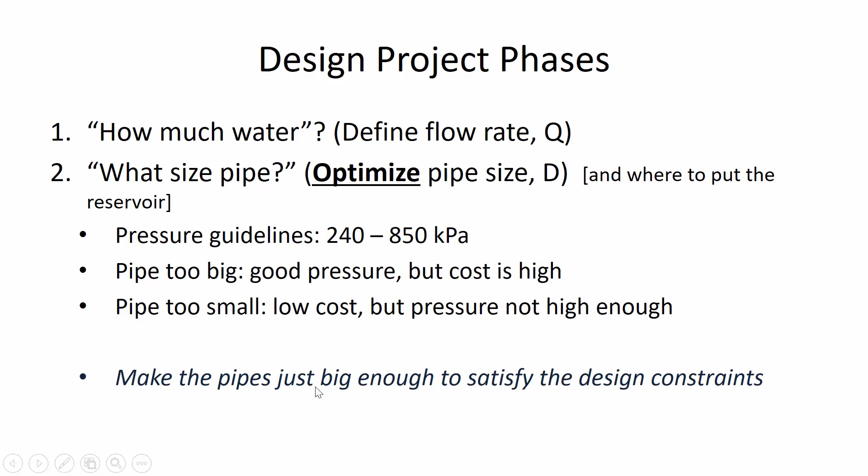But on the peak day, it's okay for it to dip as low as 240. So it makes the pipes just barely big enough. That's the essence of iterative design.

Now, there are a couple of resources here that if you maybe have lost touch with the very brief demo we had in lab last semester and you want a refresher on how to click on the buttons and how to type in pipe data and that sort of thing, I have a couple of YouTube videos there, and these slides are available on MU Online, so you don't have to necessarily write down this link. You can just click on it in the notes.

Nowadays, I think most programs have a built-in PDF printer, but if your computer doesn't, you can get a free open source PDF printer so that you can go straight from the program to printing PDF files. PDF Creator is a good resource for that.

This is a good example of what you need to turn in a week from today. Now, this is from a few semesters ago, and one of the differences between then and now is back then I didn't give students the flexibility to locate the pipes wherever they want. So back in this day, the students were required to follow a certain route for their pipe networks.

But now you're not. So for example, see this junction J? There's no outflow at junction J, so the water doesn't necessarily even need to be there. So maybe it would make more sense to have the water go straight from K, which is the hospital, over to I, the housing project, because you're going to minimize the distance if you go in a straight line rather than going in a less direct route.

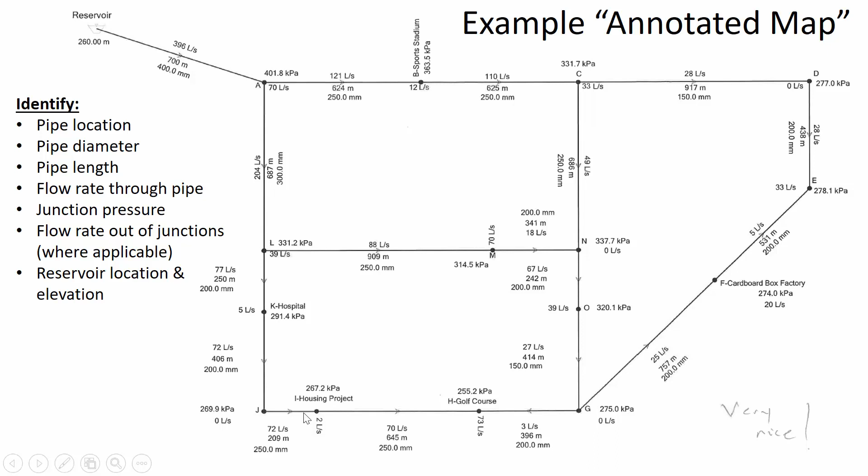All right, so now we're going to talk about some more open channel flow considerations. Remember that we've already talked about total energy, which is another word for the energy grade line. There are 3 terms to the energy grade line: the elevation above some datum, Z, the depth of flow, Y, and the velocity head.

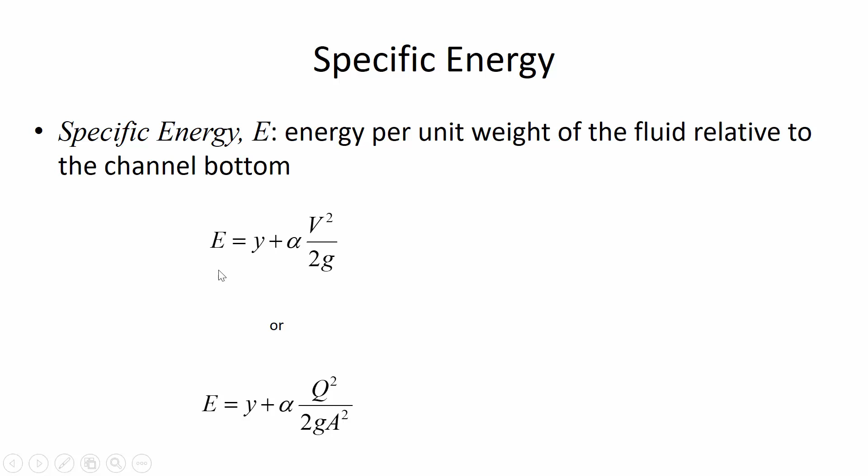The specific energy is different from total energy because it doesn't include the delta Z term, the elevation above some datum. It's called specific energy because we're talking about the energy relative to the channel bottom at a certain location, measuring the depth of water relative to the channel bottom at that spot. So for specific energy, we still have the depth and the velocity head, but there's no Z term.

To illustrate how we use specific energy and what it means, let's consider a rectangular channel that has a bottom width of 4 meters and some unknown depth. The flow rate Q is going to be the velocity times the cross-sectional area. Let's say we're going to have this channel convey 10 cubic meters per second.

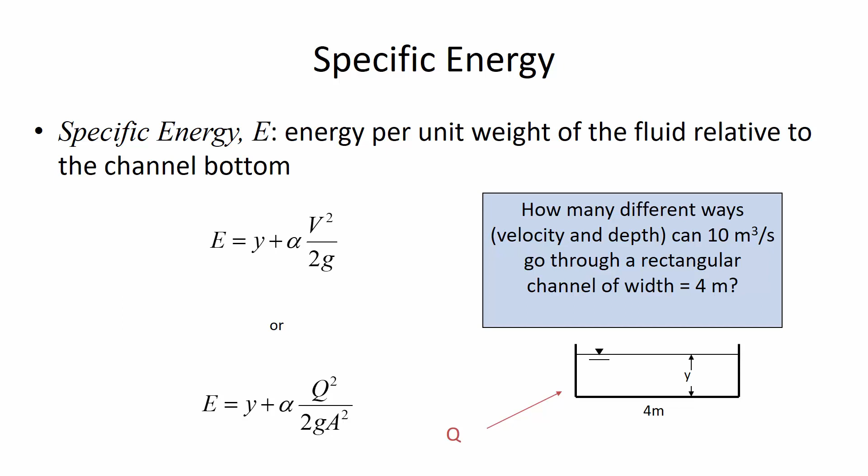Now think about all the different combinations that could occur of velocity and depth. For instance, you could have a really shallow depth but the water moving fast at a high velocity, so you'd have a high V and a relatively low cross-sectional area. That would be characteristic of a pretty steep slope - that's how you get a fast velocity with a shallow depth. At the other end of the spectrum, if the slope was relatively mild, the depth would have to be taller and the velocity of flow would be less. Any questions so far?

Here's a table that illustrates a range of extremes. At one end, here is a high velocity for the certain flow rate. If we know the cross-sectional area is Q divided by V, then the cross-sectional area here would be 1 for this top row. The depth is A divided by 4, since we know the cross-sectional area is the bottom width of 4 times Y. So if we rearrange to solve for the depth Y, it's whatever the area is divided by 4.

For each one of these different combinations, we could calculate the specific energy. I've done that thing to the velocity head that we sometimes do - rather than saying V squared divided by 2G, we can also express the velocity head as Q squared divided by 2GA squared. We did that sometimes in closed conduit flow, and we can do the same thing in open channel flow.

So take, for example, if the velocity is 10, then the cross-sectional area is 1, and the depth would be 0.25. We could calculate the specific energy: it would be this depth of 0.25, plus Q squared divided by 2GA squared. You'd have a pretty high specific energy at this top row, and most of it is coming from the velocity head. Do you see how that's the case?

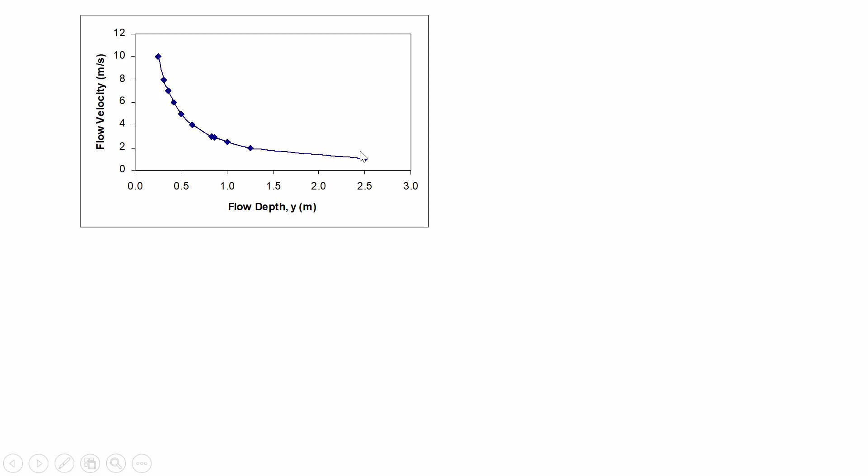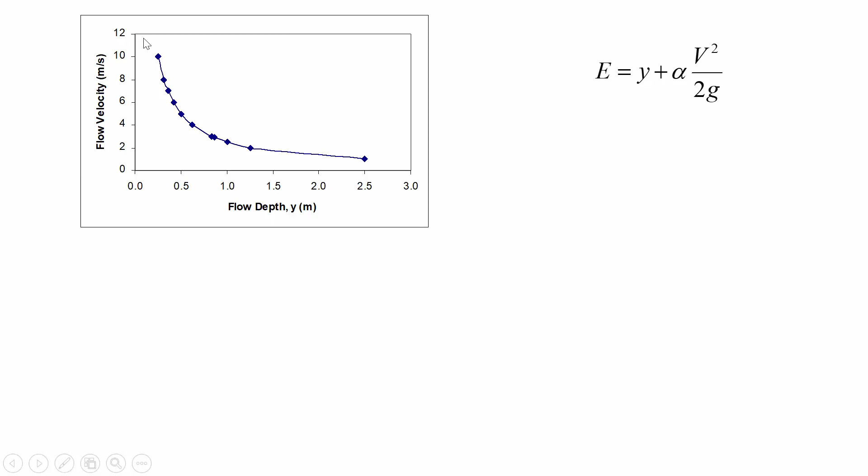Okay, so if we go back to the underlying data, you'll see that there were two different depths of flow corresponding to the same specific energy. Take, for instance, around 2.5 meters of energy in the lower range where you have low velocity and high depth. But then there's another crossover point where you again have the same 2.5 meters of specific energy, but that's where the velocity was much higher and the depth of flow is much lower.

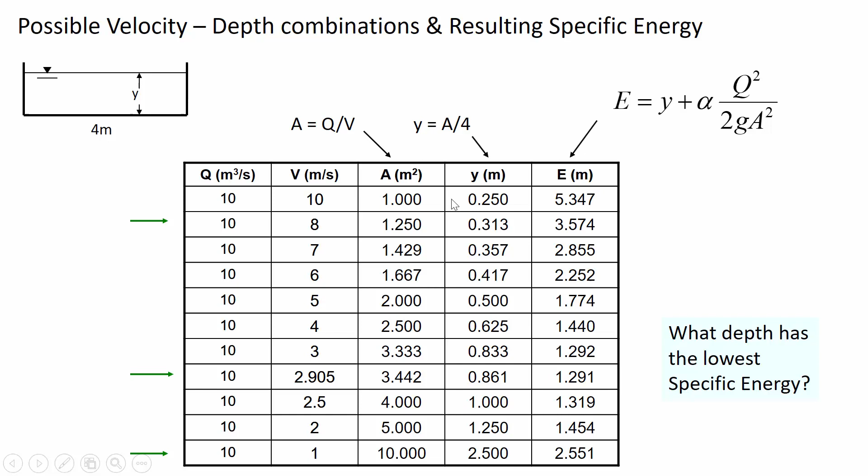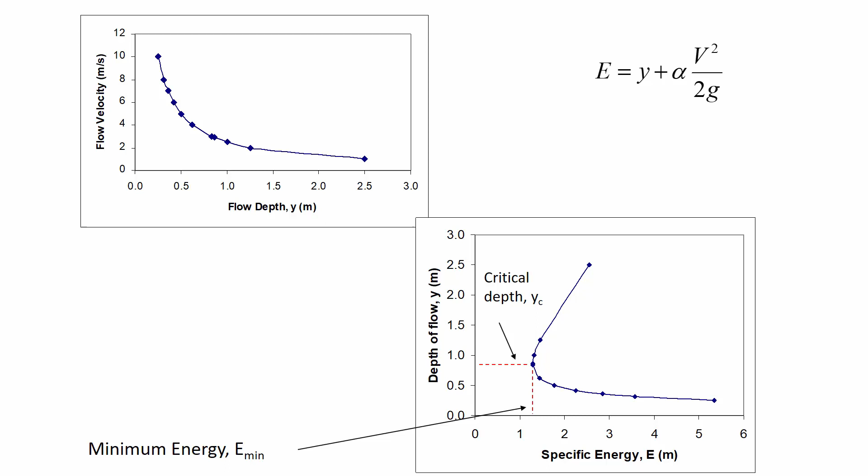So what we've done is taken this E column and the depth column and graphed it this way. The critical point of the lowest specific energy, we can reflect over to the vertical axis, and that's the same depth, the critical depth of 0.861 meters in this case. That corresponds to the minimum specific energy for a certain flow rate. Now it's for a certain flow rate and a certain channel configuration. Remember, this is a 4-meter wide channel. If it was any other channel geometry, it'd be a completely different figure. Or if it was any different flow rate, the figure would be changed as well.

Now, the thing that controls whether the flow is going to be supercritical or subcritical is predominantly the slope of the channel. I mean, all of the geometric parameters play a role, but there's a region of this graph, any flow depth that's below the critical depth, we call this region supercritical flow. I know that's going to be counterintuitive at first because you'd think, well, if it's below a line, why is that supercritical? So this red dotted line is the depth that corresponds to critical depth. If any of the depths are less than that, then the velocity is faster. So this is the region of the figure that's supercritical, and above the line, the water is moving slowly because it has a relatively higher depth.

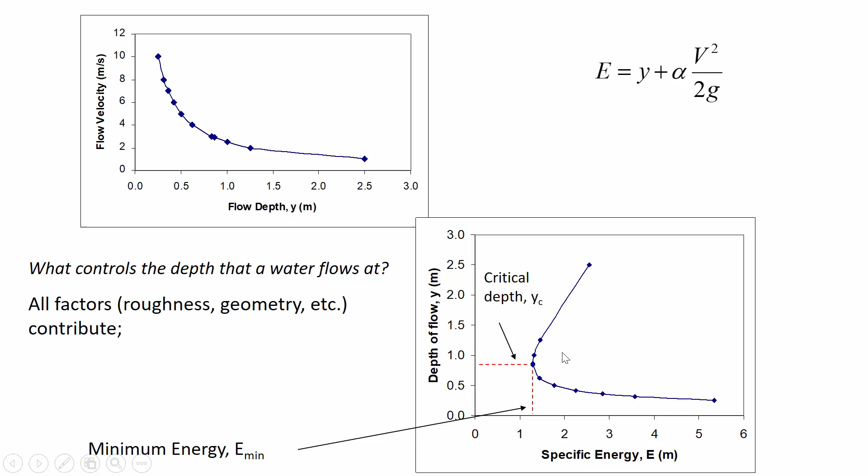So for the slower moving water, you have subcritical conditions above the line. We'll get into all of that, but what actually determines whether the flow depth is shallow or deep and whether the velocity is fast or slow, slope is the main factor that controls it for a given section shape.

Is the critical depth in the box, or is it anywhere below that, where it's supercritical? Yeah, it would be any of the depths below it.

Along this line is the specific energy that corresponds to various depths. So if you had a flow depth of 0.5 meters, the specific energy at 0.5 meters is, it looks like, around 2 meters of energy.

The other thing that's a really big idea you're going to hear over and over through the coming lectures is the idea of alternate depths. These are two depths that have the same amount of specific energy, for example, of 2 meters.

If you have 2 meters of energy, the flow might be going, looks like maybe 0.45 meters of depth. That would be the supercritical depth associated with that specific energy. And then if you go back through the other intercept of that figure, it looks like there's also a flow depth of around 1.9 meters for the same specific energy.

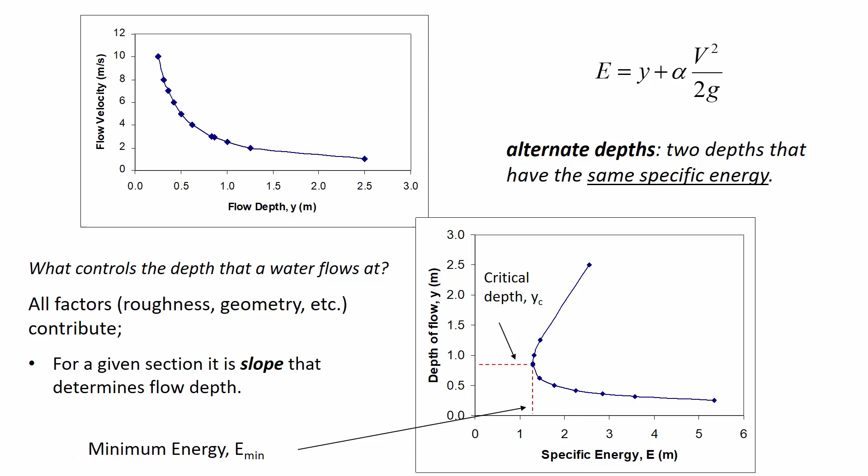The idea is that if you can graph this specific energy curve, then you can predict what depth the water is going to jump up to after it goes through the hydraulic jump. It's important to be able to predict what the alternate depth is going to be.

So different ways to classify flow. We've talked about how flow can be uniform, non-uniform, steady, unsteady, turbulent, laminar. Critical and subcritical is another way to classify flow regime. When the depth of flow is greater than the critical depth, that's when conditions are subcritical. And when the depth is less than the critical depth, that's when flow conditions are supercritical.

Sometimes people get it confused because it's not necessarily the depth that the name is based on, but it's the velocity that the name is based on. Subcritical corresponds to the flow conditions when the water velocity is slow.

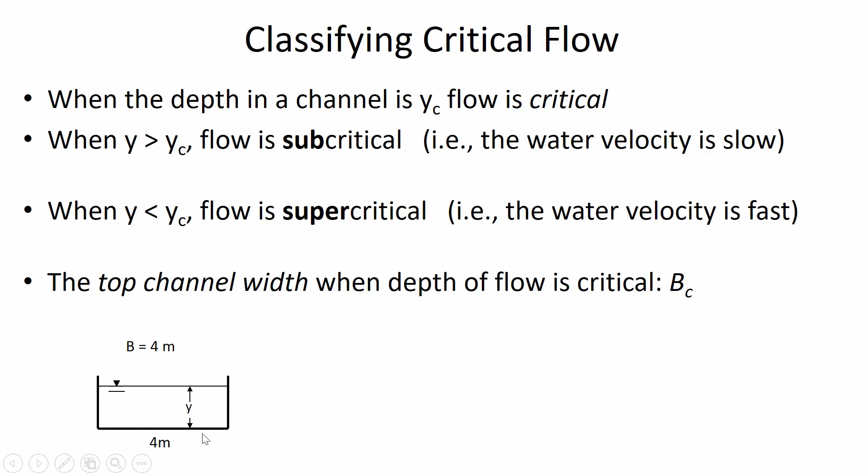There are some geometric parameters we can calculate. The top width at critical conditions is B sub C. With a rectangular geometry, the bottom width and the top width are going to be the same. But with trapezoidal geometry, this top width is going to depend on how deep the water is and what the side slope characteristics are.

The reason I mention this top width is that one of the formulas we can use to calculate the Froude number is shown here, which you've already seen. But for trapezoidal geometry, it's easier to use this equation on the right, where you've got the flow rate, the top width, gravitational acceleration, and the cross-sectional area. So this is the Froude number squared.

The reason it's important to know the Froude number is that if your Froude number is less than 1, that corresponds to subcritical conditions, and greater than 1 is when you've got supercritical flow.

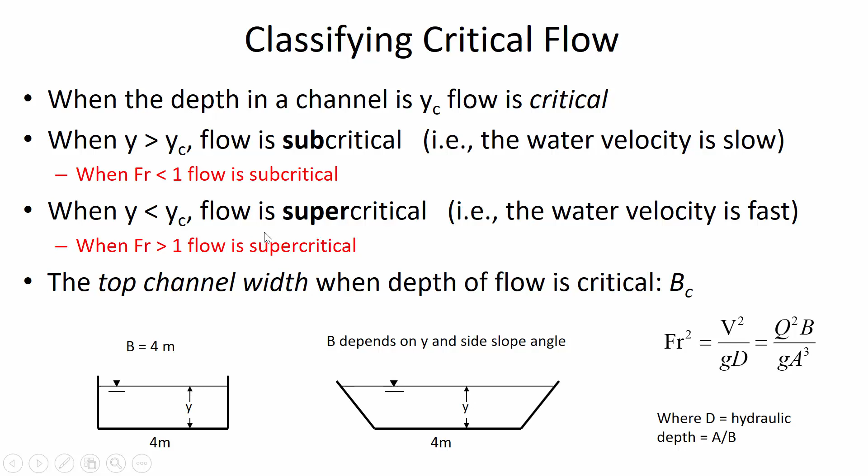Hydraulic depth is usually assigned D in your book. Some other references, including the FE manual, call it Y sub H. It's the ratio of the cross-sectional area to the top width.

Consider the hydraulic depth of a rectangular channel. If the cross-sectional area is B times Y, and you divide that by B, the hydraulic depth of a rectangular channel is just Y.

There's a special case for a very wide channel, which has a technical definition. This semester, a very wide channel is one where the width is more than 20 times greater than the depth. In that case, whether it's trapezoidal or rectangular, the hydraulic depth is also just equal to Y.

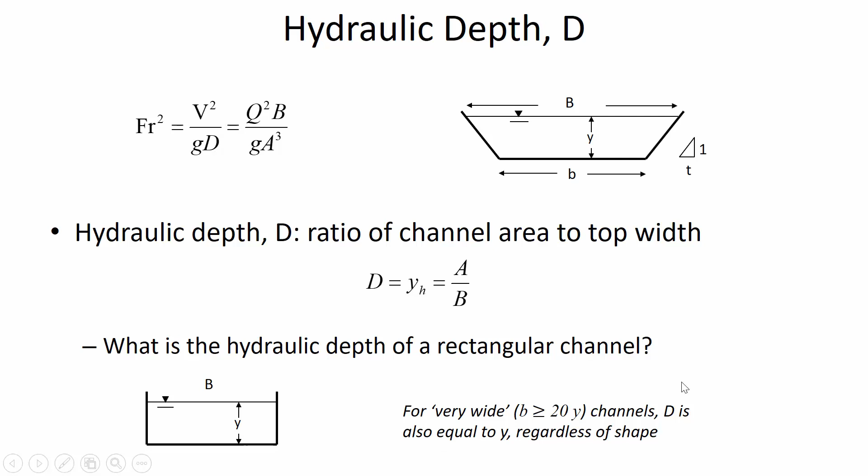The reason is that if the channel is very, very wide, the effect of any side distance is mitigated. If it's trapezoidal but extremely wide, those side triangles don't contribute much cross-sectional area, since the cross-sectional area is mostly the rectangular portion of the channel. So there are a couple of special simplified versions of these formulas that we'll go through in coming lectures, only applicable for a very wide channel.

I'd like you to get some practice diagnosing the flow regime. Let's say we have this same 4-meter wide channel with 10 cubic meters per second going through it. What is the Froude number when you've got a depth of 0.25 meters? And what is the Froude number when you've got a depth of 1.25 meters? We're trying to determine the flow conditions—supercritical or subcritical—for each of these depths.

Let's not solve it using the graph this time, let's just go straight to the Froude number. It says to solve it both ways, but because the quiz put us a little behind on time, we'll just do the Froude number.

I guess we don't actually have to create the graph, we can just look at it and use it to diagnose both cases. For a depth of 0.25, using the vertical axis, 0.25 is less than the critical depth. The minimum specific energy occurs at a depth of about 0.86. If the depth is below that minimum point, it's in the supercritical range. So for this first depth of 0.25, conditions are supercritical.

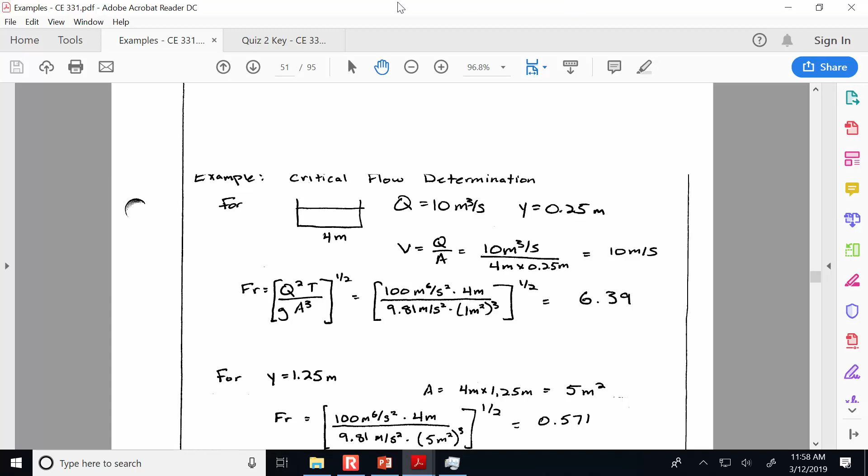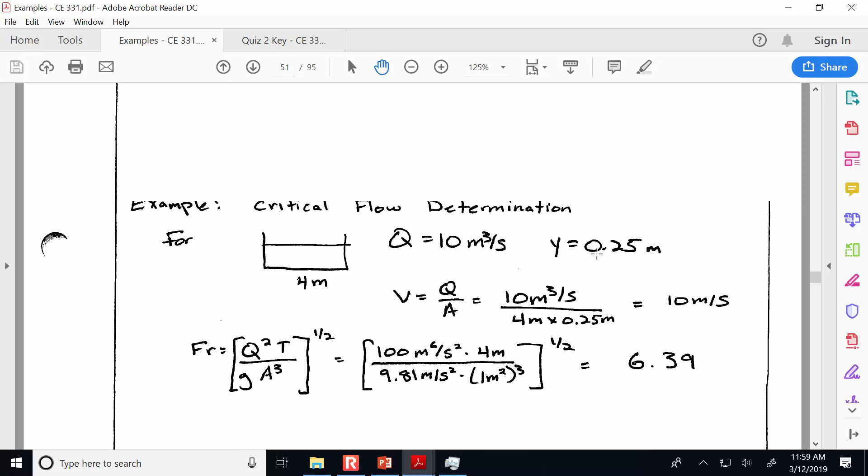We can confirm that by calculating the Froude number. If the flow rate is 10 and the depth is 0.25, we can calculate the cross-sectional area and find the velocity, which is 10 meters per second. The Froude number is the flow rate squared times the top width of 4, divided by g times area cubed, then take the square root of everything. Since the Froude number is greater than 1, that depth of 0.25 yields supercritical conditions.

So that one is supercritical. Now what about the depth of 1.25 on the graph? 1.25 is greater than the point associated with minimum specific energy, so it's in the subcritical range. We can verify that by calculating the Froude number: with a depth of 1.25, the cross-sectional area is 5. Putting that into the same Froude number equation gives a Froude number of 0.571, so that's subcritical.

So supercritical is when the Froude number is more than 1, and subcritical is when the Froude number is less than 1. We can create a figure from it and calculate the Froude number. Any questions about this example?

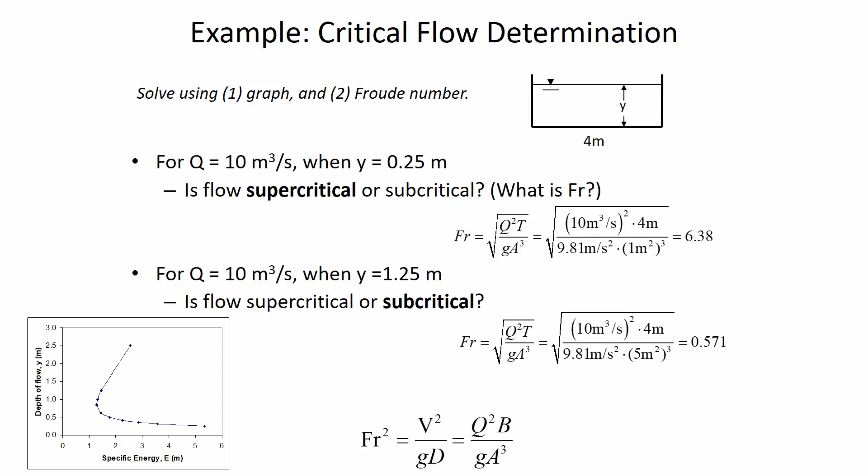Alternate depths are situations where the same amount of specific energy yields two different depths of flow. If you draw a vertical line from any particular specific energy and it crosses the graph in two locations, that means two different flow depths could occur.

If the depth is 0.5 meters, you can solve for the specific energy that goes along with that depth from the graph by going over and intersecting. The other way to find the specific energy is to substitute the depth of 0.5 and find the cross-sectional area for this width of 4 and depth of 0.5, which gives you both the velocity head and the depth term for specific energy.

To solve for the alternate depth, we would find the total specific energy at one of the depths, and then find the amount of specific energy being the same for the other depth.

There isn't a marker here in the classroom, but I can usually count on at least one of you to have it. Thank you very much. All right, let me do this one on the whiteboard.

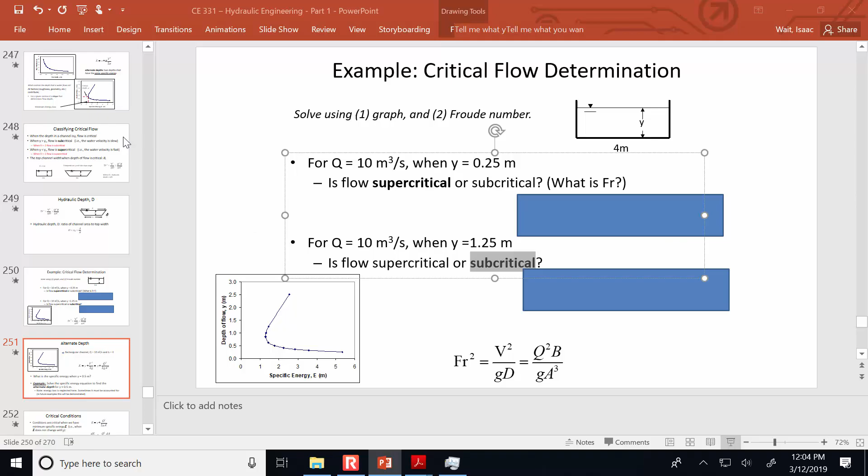What we can do is say that 1.774 meters equals y plus 100 divided by 2 times 9.81 times 4y squared, putting that in terms of the unknown depth, this other unknown depth that can give you the same amount of energy.

So y is the unknown depth. We still know that the flow rate is 10, so 10 squared divided by 2g, and then the cross-sectional area is 4 times whatever the depth is, squared. So we can rearrange this. This is going to be a cubic equation.

So we're going to multiply each term by y squared, giving 1.774 y squared equals y cubed plus 0.3186, since this last term is the same thing as 0.3186 divided by y squared.

So if we just have 100 divided by 2 times 9.81 times 4 squared, that cubic equation then is plus 0.3186.

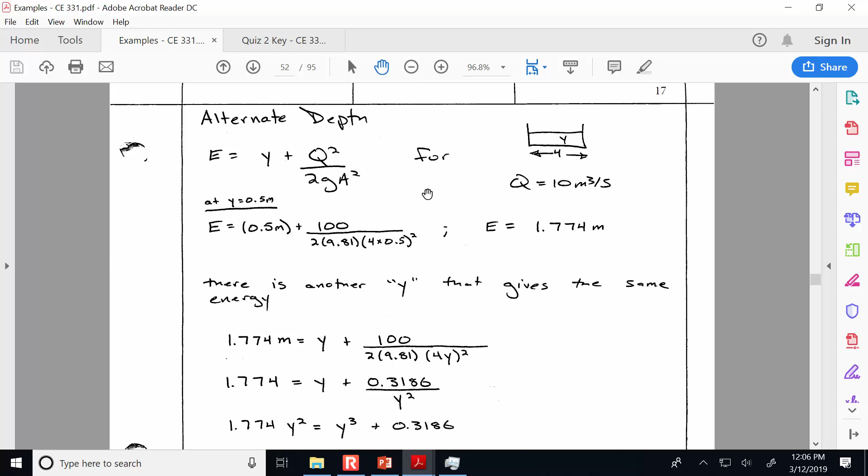If you put it into your calculator, you'll find the three roots: one is negative 0.3842, another is the depth we already knew, 0.50 meters, and another root is the depth we're looking for, 1.658 meters. That is the alternate depth, 1.658 meters. You could solve it numerically using a spreadsheet, but you can also solve it by finding the roots of that cubic equation.

Any questions about alternate depths?

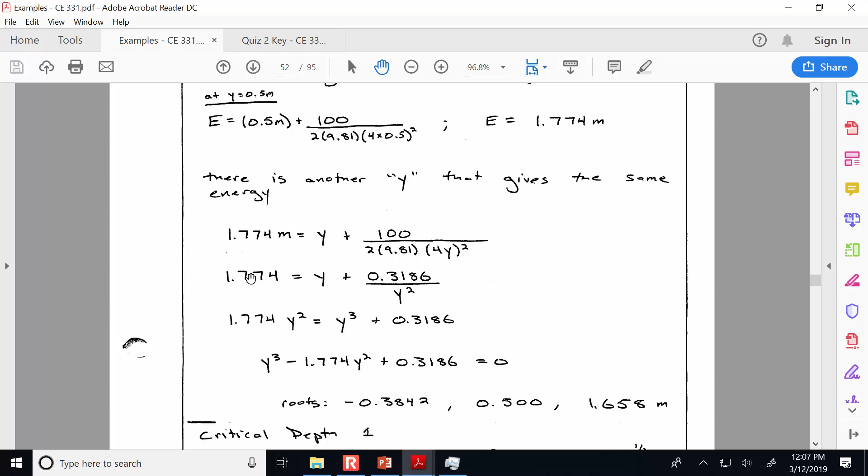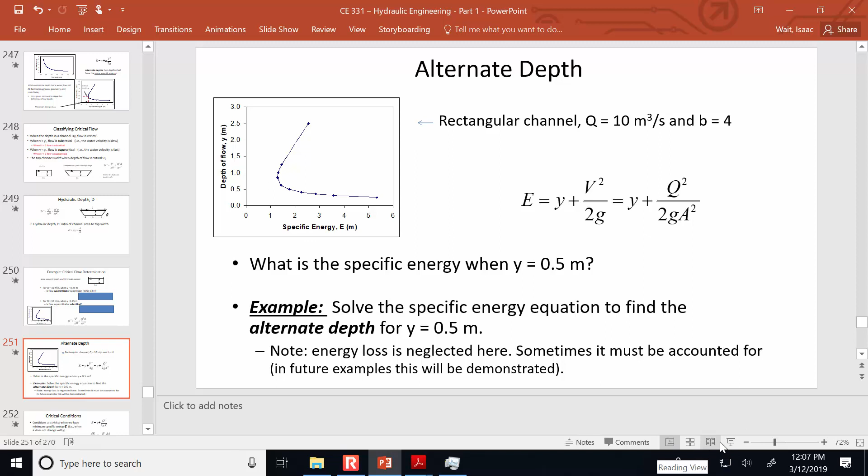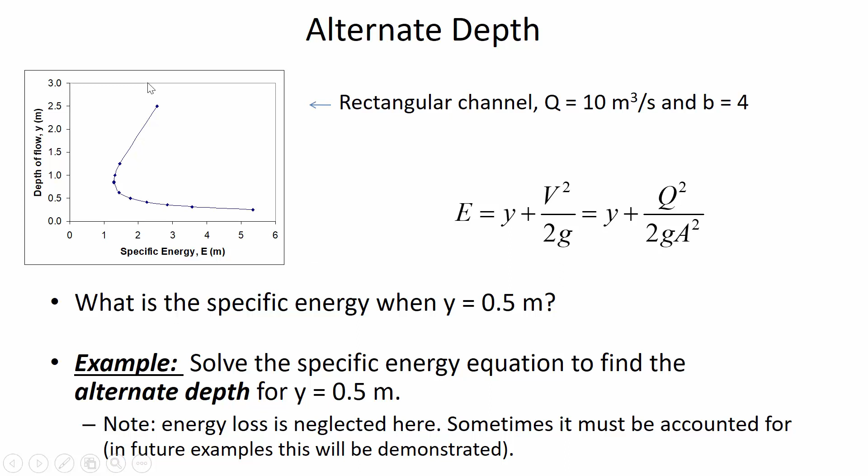One thing we didn't account for was any energy losses as the water transitions from a supercritical to a subcritical depth. In a hydraulic jump, in reality, when water goes from a supercritical depth to a subcritical depth, there's a lot of turbulence and quite a bit of energy is lost. We will account for and demonstrate those energy losses in the future, but just looking at the theory behind specific energy and alternate depths, we haven't yet accounted for any of those losses.

Critical conditions correspond to the minimum amount of energy to convey a certain flow rate through a channel, so it's where you have minimum specific energy. That means if you look at this curve, there isn't any slope at the minimum point—it's completely vertical, not sloped sideways like in the subcritical or supercritical zones. This is the definition of specific energy: it's just the energy relative to the channel bottom at a given location.

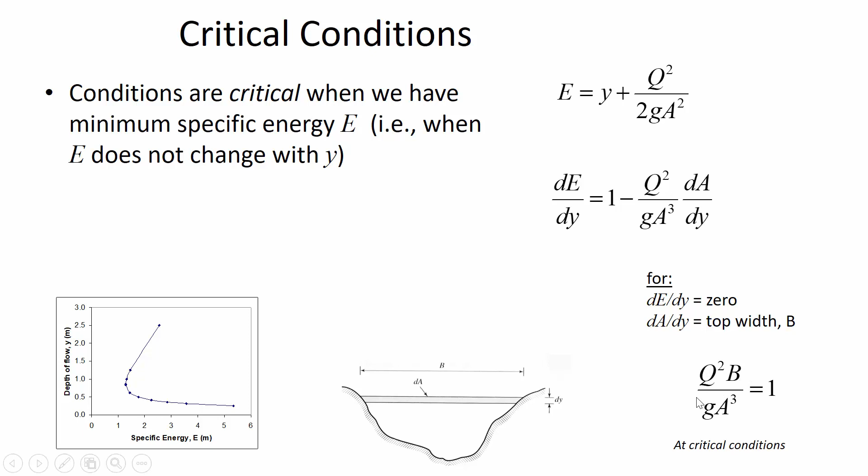If we take the derivative of that with respect to y on both sides, this is where the Froude number equation comes from, where the Froude number equals 1 at critical conditions. So the flow rate squared times the top width divided by g times A to the third power equals 1 at critical conditions.

If we rearrange that, since this was 1 on the right side, under critical conditions, if we want to find the critical depth, regardless of the cross-sectional shape—whether trapezoidal, half circle, or triangular geometry—this can always be used to tell you what the critical depth is.

As an example, if you want to find the critical depth for a rectangular channel where the flow rate is 10 cubic meters per second and the channel width is 4, this is that same rectangular channel we've been talking about today. We can find the critical depth using this formula.

Just by substituting in, it's q squared divided by g. Now for the cross-sectional area, if the width of the channel is 4 and the unknown depth is y sub c, the right hand side of the equation would be 4 times yc cubed, divided by b sub c, where b sub c is the channel width at critical conditions.

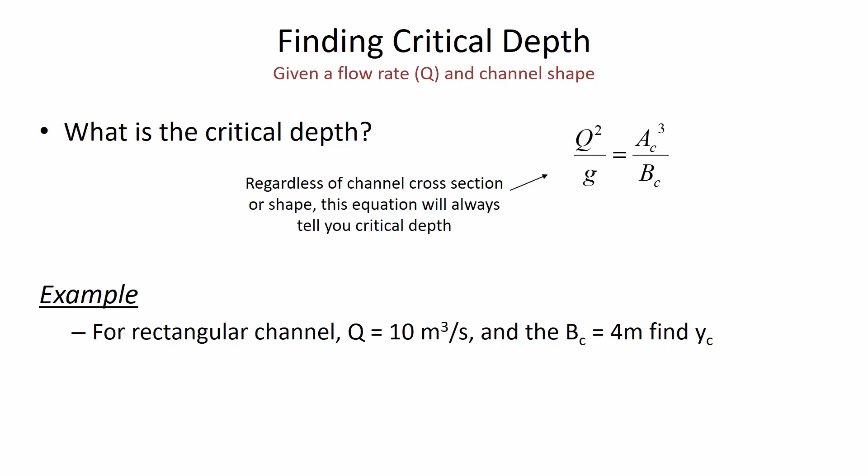That's the full-blown equation, but here's a simplified way to find the critical depth only if you have a rectangular channel, meaning the top width and bottom width are the same. What you can do is calculate the flow per unit width, lowercase q, which means the overall flow rate Q divided by the channel width. This formula can only be used for a rectangular channel cross-section.

With the example we've just been looking at, the uppercase Q is 10 cubic meters per second, and the channel width B is 4 meters. Then lowercase q is Q divided by B. So there's 10 cubic meters per second divided up among 4 meters of width, giving a flow per unit width of 2.5 cubic meters per second per meter of width.

The critical depth y sub c, which we can only use when it's a rectangular channel, is the flow per unit width, 2.5 meters squared per second, squared, divided by 9.81 meters per second squared, then take the 1/3 power of that. So 2.5 squared divided by 9.81, to the 1/3 power, again gives you the depth of 0.860 meters.

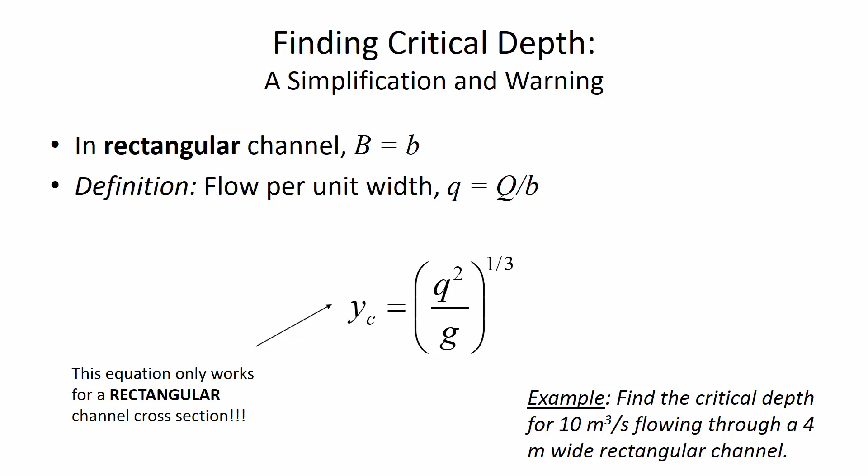So you can find the critical depth either according to the full-blown formula that'll work for any kind of shape, but a lot of the time these problems assume a rectangular geometry, and so then you can use the simplified approach based on the flow per unit width.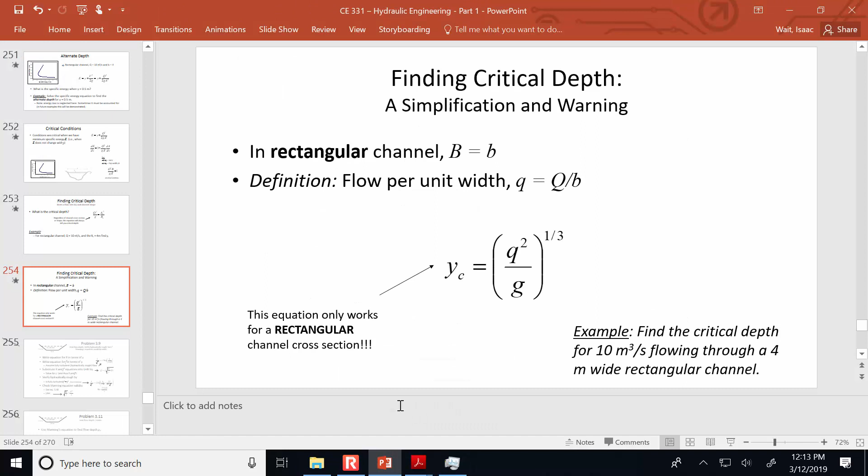One last thing: you can sometimes face problems asking you to determine the critical slope. The critical slope is just how steep the channel needs to be to cause critical flow depth. This would be a combination of both the formula for critical geometry and Manning's equation. They would tell you the flow rate, the side slopes, the bottom width, so you can use those geometric parameters to set up Manning's equation. What you're trying to solve for is the slope that gives you the depth corresponding to critical conditions.

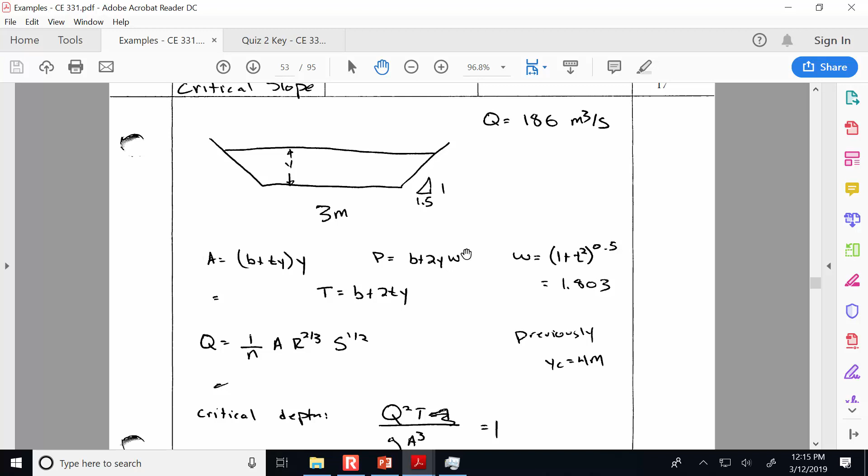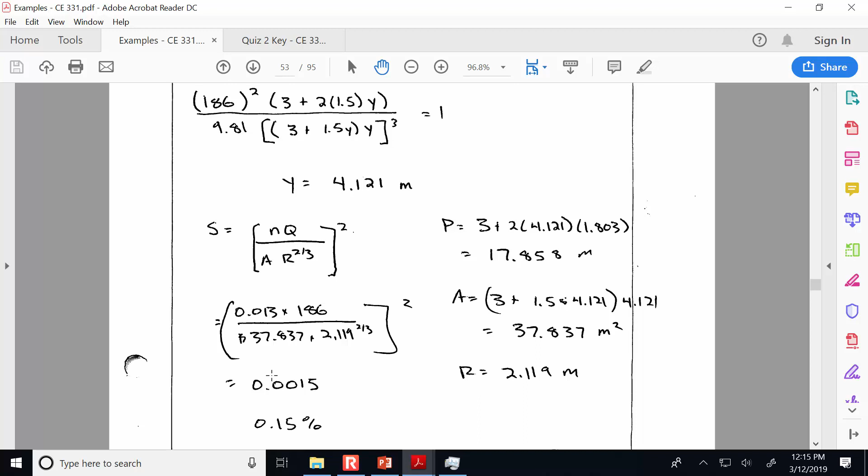It's a two-step process. First we'd have to use the full version of the critical equation; we couldn't use the rectangular simplification we just found. So you solve for the critical depth with this formula, then put that critical depth into Manning's equation. I'll briefly show you what the solution looks like. We know the area formula from the factor table, we've got the wetted perimeter, the W term, and everything. With the critical depth equation you can find the depth that corresponds to critical conditions, then you rearrange Manning's equation for the slope, solving for how steep the channel has to be to cause the critical depth. Sorry we didn't have enough time to actually calculate through that one, but hopefully you get the idea.